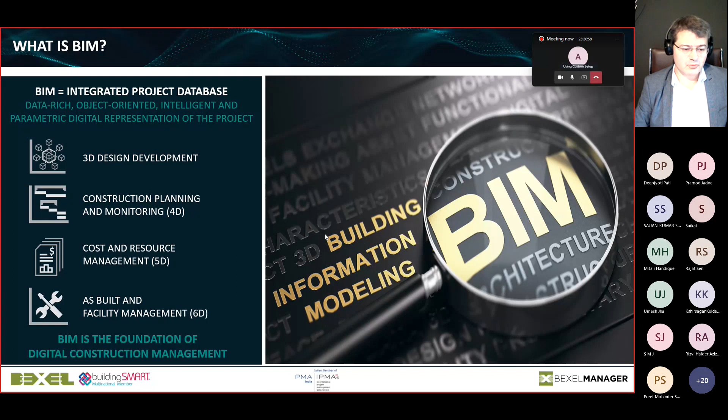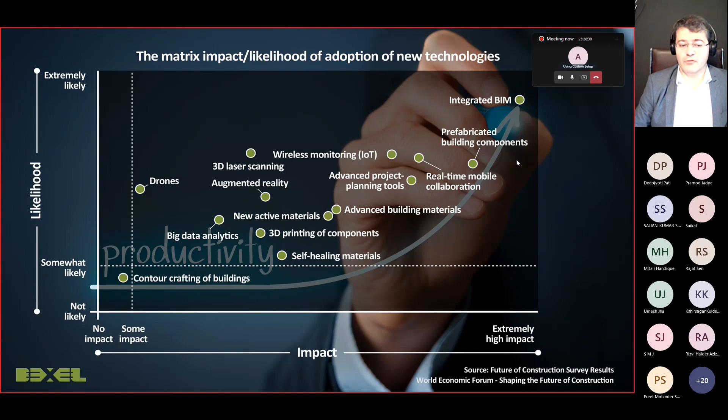There was research done by the World Economic Forum about what will have the highest impact when we are talking about new technologies in the construction industry. Of course, the focus was always on productivity, and in their research they used various cool new things like augmented reality, 3D laser scanning, drones, 3D printing, big data analytics, and so on. And the result at the end was that integrated BIM, the ability to integrate this data, to have a concept of a single source of truth, will have the highest impact and is most likely to happen in the near future. And that's actually what we have been doing for the last 17 years.

What was the problem? A lot of manual work, a low level of automation. There was also the saying that construction people are not interested in digitalization and so on. But reality is a bit different. In the beginning I was blaming the industry and the people in the industry for these relatively poor results. But reality is different. Construction projects are by far, in terms of project management, the most complex challenges, and execution of those projects is the most complex and challenging compared to all other industries.

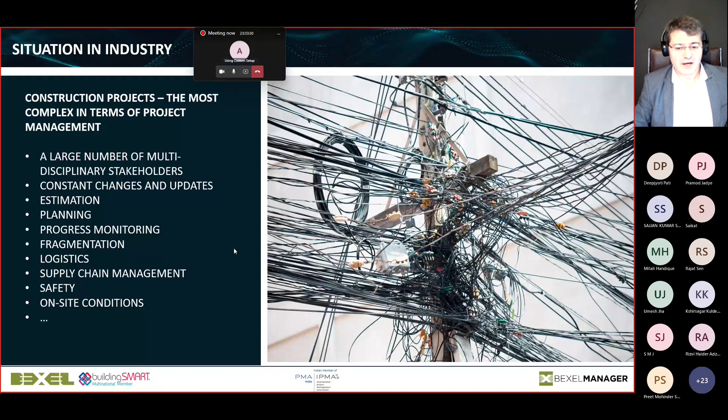And that's why we are facing challenges in these processes. So the only solution is if we have a certain automation. Otherwise, we will still have no significant improvements and, I have to say, unfortunately, poor performance because of all these challenges. Simply, humans cannot manage all these challenges; they could have extremely high experience, but it's very difficult to manage this manually.

Another challenge, as with every new technology. So this is an interesting statistic. More or less, it's the same with all new technologies. People first do not trust technology, are not willing to change. We as humans are reluctant to any change, almost all of us, and that's what we see here.

Especially if we do not know something. The people in this statistic, this is from the United Kingdom, say they are not using BIM because it's not a client demand. And of course, we don't have expertise. There is also an issue with cost and so on. But the thing is that when we do not know something, we are not focusing, we are not willing to change and to switch to new technologies.

Another problem, like with every new technology, is that we have a lot of gurus who promise that they will solve all your problems and so on. Usually the most aggressive ones are those who know the least, as usual, and they promote what we call Hollywood BIM, or BIM for the sake of BIM, where you digitalize yourself not for the sake of benefits, but just to be digitalized. And then, of course, results are not good. Return on investment, you do not see the benefits.

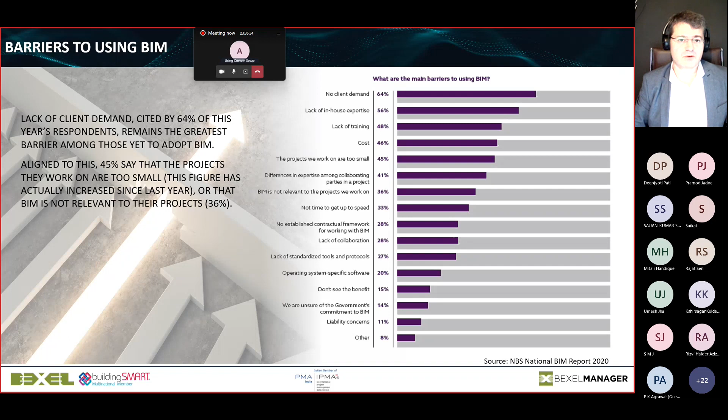So it's always, like with every new technology or new service, about choosing good professionals who really can help you and focus on the real tangible benefits like cost optimization, time optimization, increased quality, and so on.

And knowing the total value of the global output, or even in India, of the construction industry, we are talking about trillions of dollars which could be saved and optimized. Of course, in order to achieve those numbers, we need to focus on the benefits, not on, as I said, Hollywood BIM or just nice videos which cannot bring us real conclusions, but have a digital decision-making process which of course can bring the benefits. The same goes with technologies in other industries.

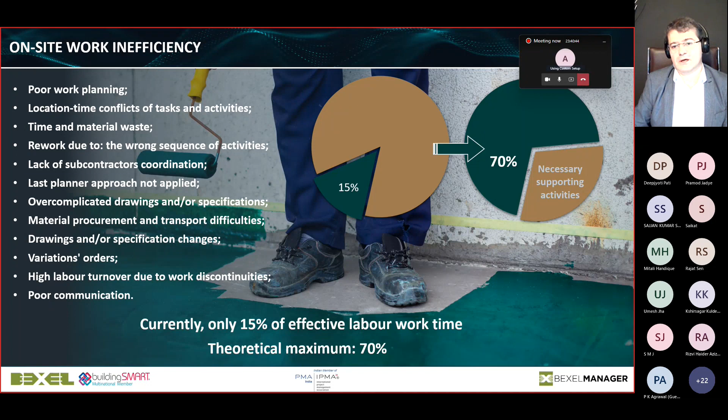So again, construction projects are extremely complex, extremely difficult in terms of project management. On the other side, there is a huge opportunity for optimization, huge potential for more efficient and smart work on construction projects. What is also the usual practice, like with all other new technologies, is that it is always adopted in certain stages where the focus is on how easy it is to implement something and not how large the benefits are.

Of course, the construction stage is very important, but still Excel is the most used tool in this stage, along with some traditional planning tools. For all analysis like monthly progress and financial analysis, you might be surprised, Excel is still the most used solution. So it means a lot of manual work, a lot of manual calculations, a lot of possibilities for errors and mistakes. On the other side, this is one football stadium for the World Cup we now have in Qatar.

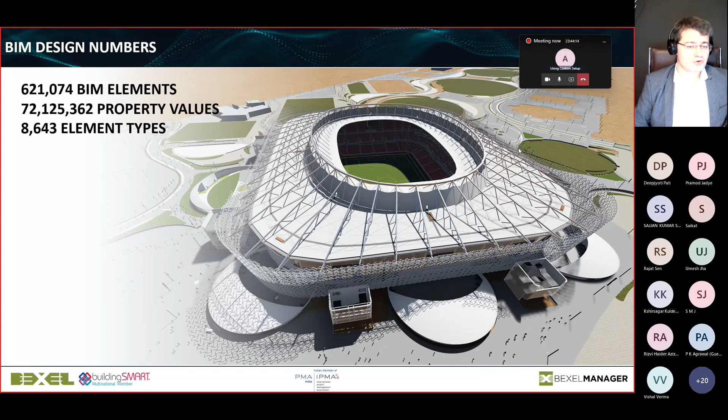Because if we have manual things to do, like in the most popular planning tools, the problem is not that they are not capable of doing certain things. The problem is that due to the manual or semi-automatic process, we cannot cope with the changes and other stuff. And the same goes for estimation and all other analysis. So these are some of the ideas of what can be done using BIM. Very detailed Gantt and line of balance charts, which contain, of course, all relationships with resources.

The second concept is a concept of single source of truth. So how do we know that we are referring to a single source of truth? Very simple. If you change something in design, are you going to have an updated construction schedule? Are you going to have updated cash flow? Are you going to have an updated cost estimate?

Are you going to change the costs which will be included in the monthly payment certificate? Are you going to automatically check design issues with the new design version? Unfortunately, today the answer is no. Literally all these analyses are managed separately and we do not have a single source of truth.

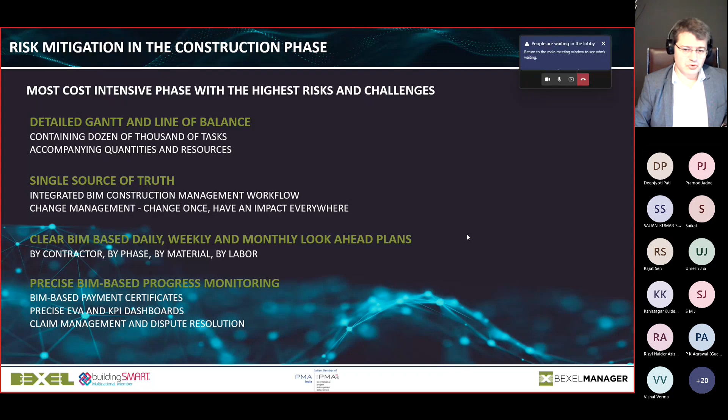And that's one of the biggest problems when we have claims: because we cannot handle all this information, it's very difficult to identify what the truth really is, and that's why we have a lot of disputes on construction projects.

If I want to explain this to you in a simple slide, the truth is that even if we have certain BIM tools applied on a project, we usually do all analysis the traditional way and then try to manually connect them with the BIM models. And we call this BIM. It's not BIM, it's just a connection. All our processes are still manual. We still have different sources of truth.

We have planning updated 3 months ago. We have progress updated a month ago. Our financial analyses are from 4 months ago and so on. And so we cannot grasp the truth. And the problem is that we do not have any optimization. This is literally just additional work for us, because we have to do everything we did before and again connect this with the BIM models.

So the reality is that we still have a lack of accuracy because we are not benefiting from the models and all this huge data, but on the contrary, we need to manually connect them, and we call this BIM level 0. So this is nice to have. There are some small benefits, but in terms of optimization, there are not too many benefits. It usually costs us more, and we unfortunately do not have actual data, detailed cost estimates and construction schedules.

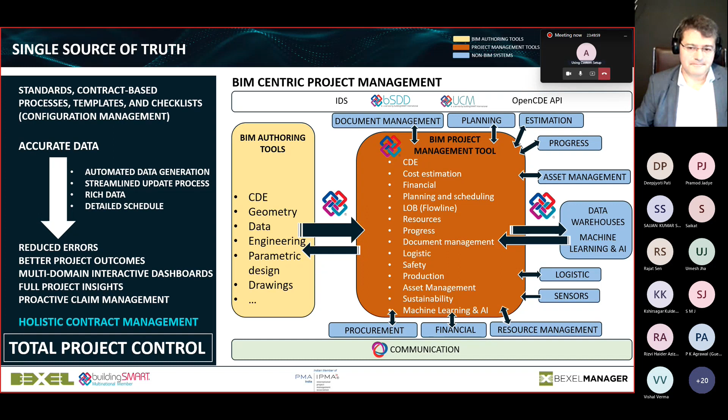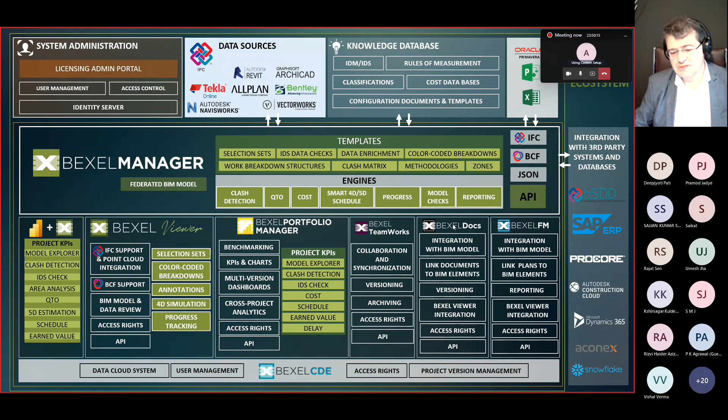So these are some of the solutions. This is an example of our technology, but you can find a lot of these examples available on our website. So I'm not going to go deep into this. I will just show you some examples of how the system works and how BIM can be used.

The thing is that when we are talking about automation, this is one of the key things. If we cannot have automation and streamlined workflows, even as I said in Excel, can we manually create 50,000 cost items? Yes. Can we manually measure all things for quantity takeoff in any construction project? The answer is yes. Are we doing that? No. When we change design, are we automatically changing this? No, simply because it's so labor intensive and prone to errors.

The same goes with the Gantt charts. Can we do a Gantt chart with 50,000 activities? Of course, yes. Can we define all relationships? Yes. Can we theoretically attach resources to all these activities and tasks? Yes. Are we doing that? No, because again, there is no automation. Without automation, simply due to limitations of time and human limitations, we cannot cope with this.

So this idea is to utilize all the data. Of course, these are now technical terms like IDS or 4D schedule generation workflows and so on. But the idea is to utilize everything which is previously generated and produce other analysis almost automatically. So here are some of the videos where you can see how it works. You have simulations, you have cash flows, you have resource usage analysis, and so on.

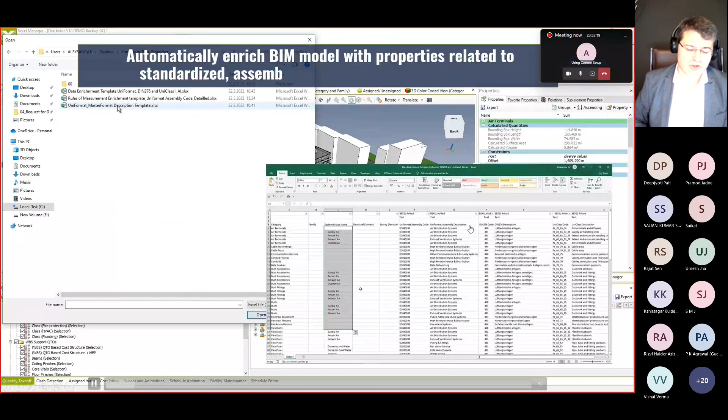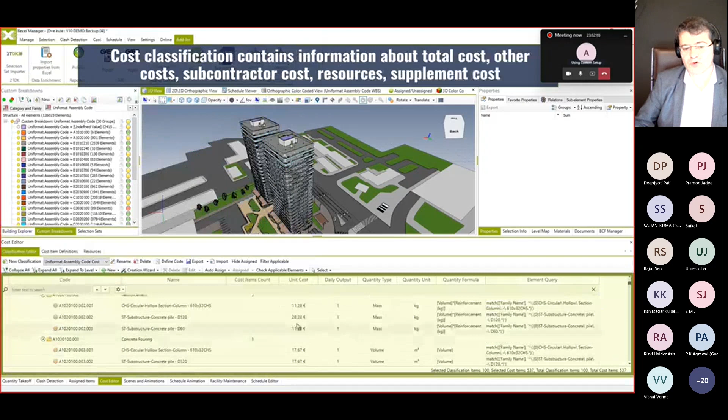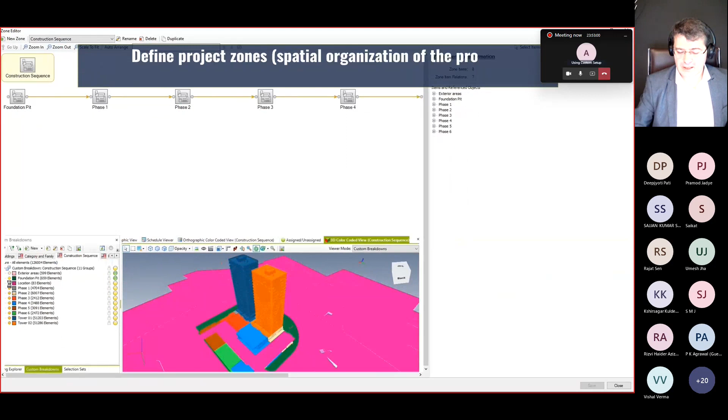In these videos, I will try to explain to you how from just the pure BIM model, without any analysis, the system automatically creates cost breakdown structures by using a knowledge-based template. It's always the idea to use previously generated knowledge. Knowledge management and utilizing our previous experience in a digital format is definitely one of the keys for this full automation. In this case, literally in a couple of minutes, a cost estimate is automatically generated. This is one of the huge innovations Bexel is doing.

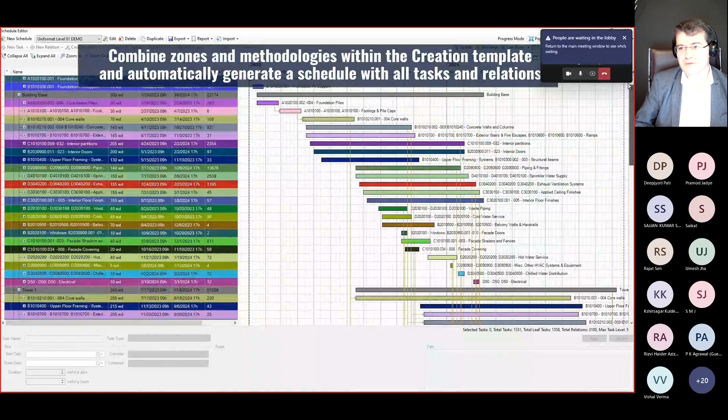This is defining the sequence of the works, or what we call the methodology or method statement. There are, of course, plenty of additional things behind this. Bexel technologies are able to literally automatically in a second generate very powerful and very detailed construction schedules, and line of balance where we see location-based scheduling. And by having all this, we can automatically do cost optimizations, identify space conflicts, see a resource analysis, and then at the end see this visualization.

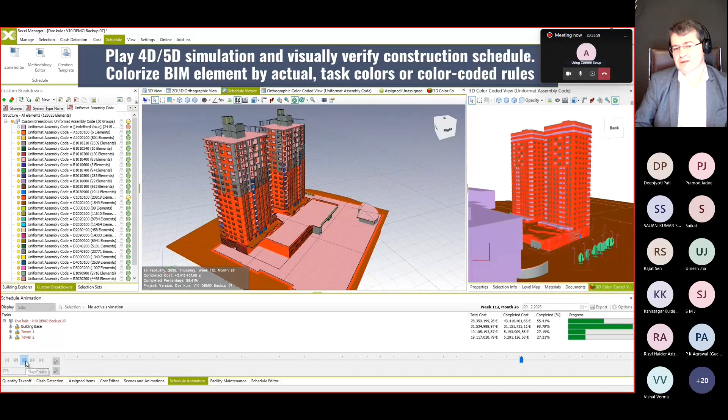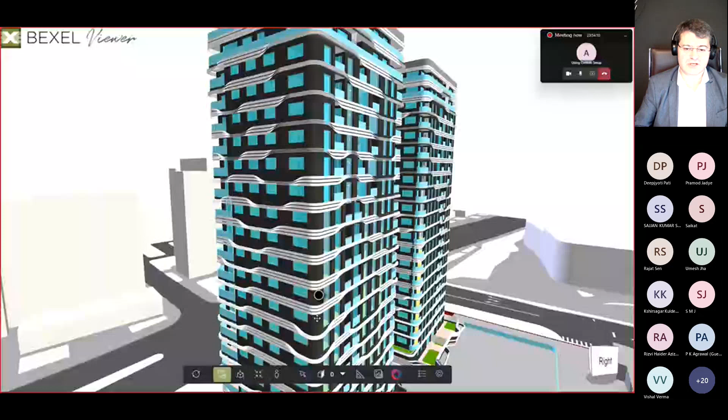So this is the end result, not the key result of the project. The ability to visualize this, if we cannot see all the analytics behind it and cannot optimize the resources, is nice to have, but does not help us significantly. The same goes with a workflow where we are able to send to the site what is necessary to be done by each subcontractor or the crew and the team.

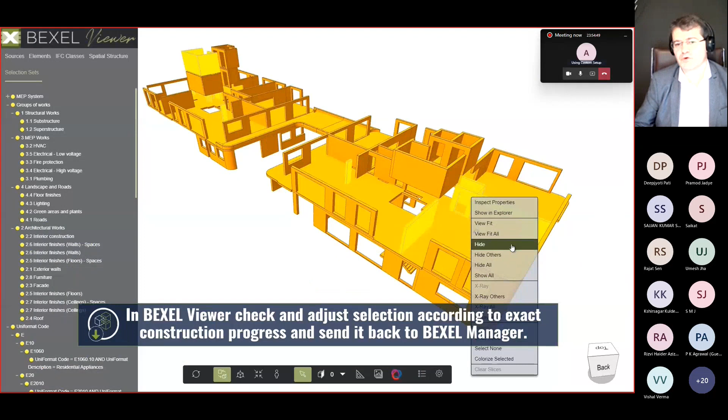It might be interesting for you to know that today's technologies are able to do that. From these very detailed Gantt charts you automatically send what has to be done to the site, and you just deselect certain elements which are, for example, not finished as planned, using certain ISO standards like BCF and so on. You send the information back to the system, and the system automatically calculates a monthly payment certificate and creates an updated construction schedule. If you just load the data from the site, you can see all these quantities, actuals and so on are automatically calculated.

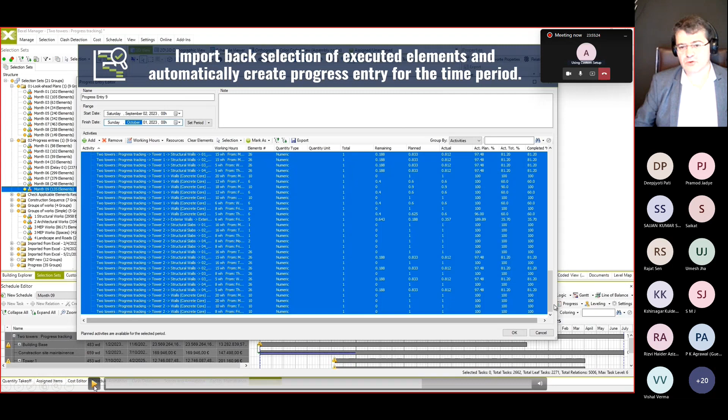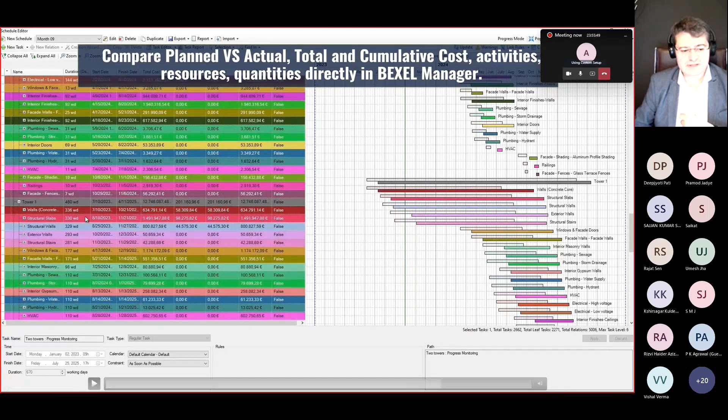To do all these numbers and calculations manually will literally take a huge amount of work, and it's never going to be as accurate as if it's done in a streamlined flow. If I just stop here, you have, for example, direct earned value analysis. You can see the differences between planned and actual works. And you see planned and actual cash flow and all other analysis automatically.

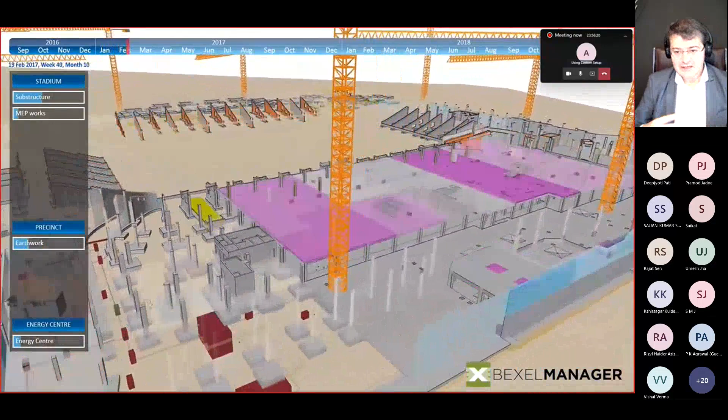So let's move to another simulation where, again, by utilizing all this, in the 72 million of property values I mentioned. I hope it's smooth. You can see how the entire stadium will be generated, literally what should be done on an hourly or daily basis. Again, to do that manually is theoretically possible, but it will take months, or I would say even years, of manual work.

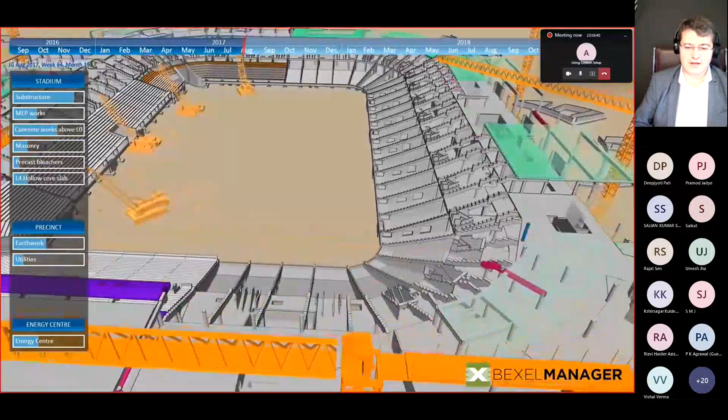And then whenever the design of the stadium is changed, you will need to do more or less everything again. So by utilizing automation, you can really combine it with artificial intelligence algorithms, because the prerequisite for any intelligence is the automation of the workflows, because the systems cannot help you with artificial intelligence if they cannot test various options easily.

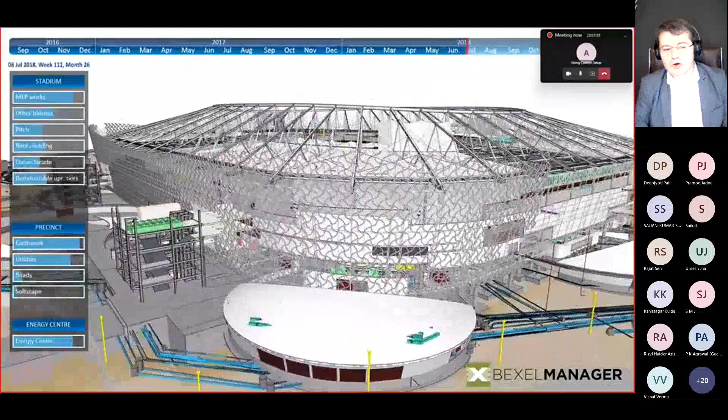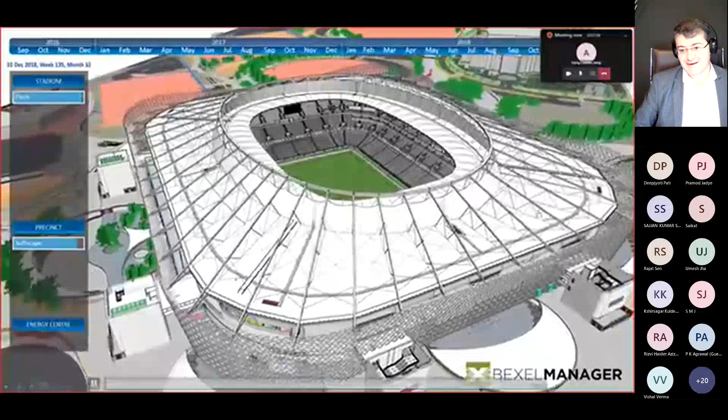And if you are doing all this stuff manually, it is almost impossible to utilize artificial intelligence, because all these neural networks and advanced genetic algorithms and so on require automation and the ability to test hundreds of thousands or millions of options in order to create something automatically. So that's why we are focusing a lot on automated intelligent workflows, because then we can play around with what-if scenarios and so on.

So one of the interesting things is, of course, location-based scheduling or line of balance, where we see different colors. We have a time scale and location. And one of the things which is very important is to always have straight lines and to prevent situations where more activities are done at the same time at the same location. What is also very interesting with location-based scheduling is that in this particular example, we can easily identify the waste. In Gantt charts, unfortunately, we cannot do that.

Of course, Gantt charts are useful for certain things, like the critical path method, and that's why we are combining them. But let's say we are working on a structural design here, or we have facade works here, and on the other side we have certain finish works here; all these gaps where we are not performing any works on a certain location are potential wastes.

Of course, sometimes they are required. For example, in this case, if we have just a building base and we are not about to sell foundation slabs separately because we need to finish the entire building, that's maybe something which cannot necessarily be optimized. But there are plenty of things which can be optimized, and they are very easy to identify with line of balance. And this is an example of an optimized, automatically generated line of balance simulation in Bexel.

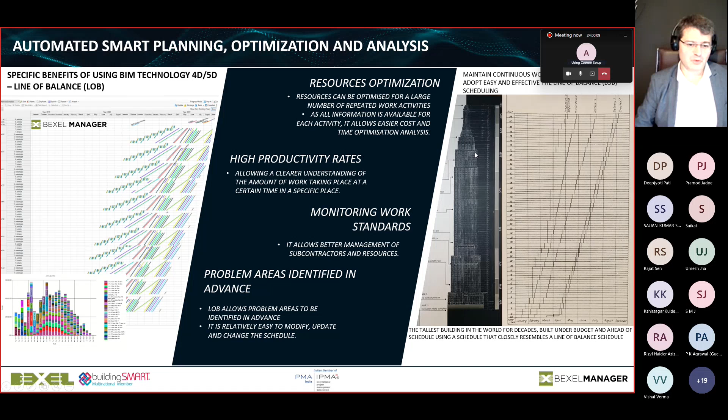And what might be interesting for you to know is that the tallest building in the world for 40 years, the famous Empire State Building, was not managed without computers using Gantt charts, because they did not exist at that time, but instead with line of balance. And this is the original line of balance and location-based scheduling. And what we can say is that this building was built in just 13 months, and today we would need much more time to do the same building. So that's where we can see that we are not always moving in the right direction.

There are a lot of guidelines, and I'm sure you are aware of them, on what should be avoided or maximized. One example is start-start or start-finish relationships. They must be minimized. Unfortunately, we usually have a lot of them, or open start, open end relationships. In certain companies, this is forbidden. When you have a lot of start-start relationships in your planning, it means I don't have data, I need to do some approximation. And the problem later, when the schedule is executing, is that this does not help us at all, because it does not allow us to update schedules automatically.

There is also activity duration. Whenever you see that an activity is longer than 5 days, or you have one activity of 6 months or 3 months, usually it means I don't know, and this is just my best guess, and this should be avoided. Then spatial, location-based breakdowns and all the other stuff are not done, not because we don't know how to do that, but simply because we cannot do that manually.

And that's why, if any professional analyzes construction schedules, 95 to 97% of construction schedules generated today are unfortunately not very accurate and not very useful for construction sites. Of course, there are examples which are excellent, but unfortunately, most projects on average are quite poor, and there are a lot of mistakes. And I'm talking all over the world, about thousands and thousands of schedules we analyzed. So these are some of the analytics of why this is.

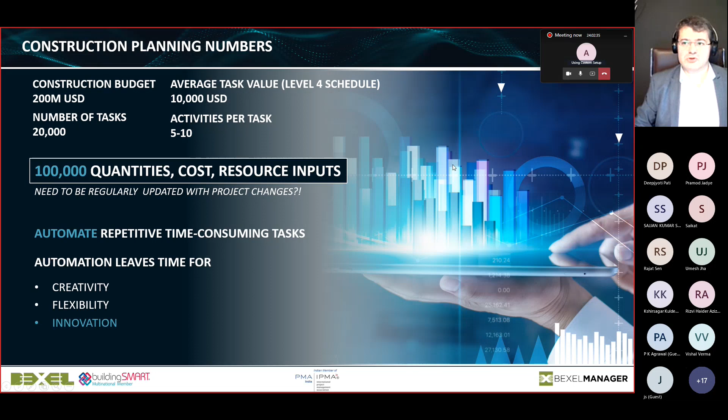Because even on a relatively small project, on a medium size, 200 million, there are 100,000 quantities, resource inputs, and this needs to be done automatically or updated constantly. And to do that in an accurate way without automation is unfortunately almost impossible. So the idea is to have trustworthy and timely information. These are some of the ideas.

So what I mentioned before. The idea is to have proactive claim management, streamlined, efficient delay detection, and time restrictions. So to focus on real delay analysis, to focus on optimized planning, and so on. So to focus on the real benefits which can be brought to the project.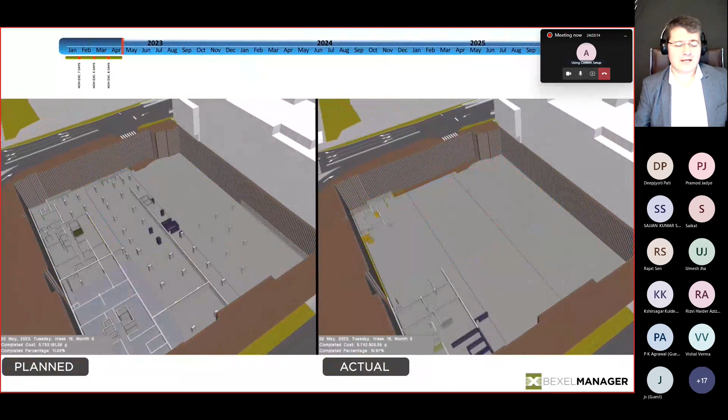So this is an example of delay analysis. In this case, window delay analysis is used, which today is maybe, let's say in the United Kingdom, the only recognized methodology in case of disputes. And so with the red line, we automatically detect all what are called non-excusable delays, or we could see mitigation,

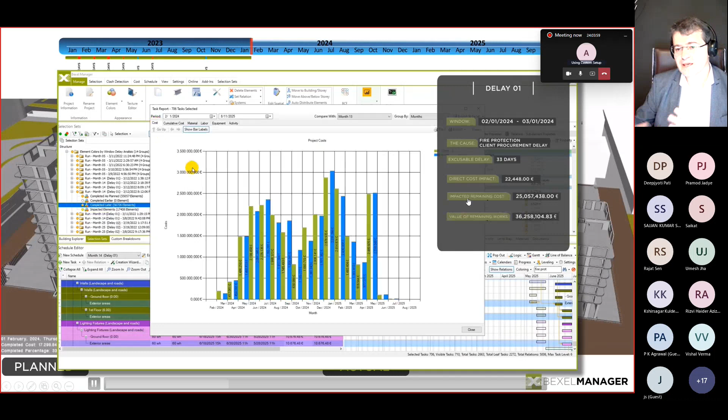and then the system automatically calculates the direct impacts on the remaining tasks. If in this case, let's say, the client did not organize fire protection in a way he was responsible for, the system can automatically calculate all the impacted tasks, and you can visually see those tasks, and the system can automatically calculate the amount of excusable delays.

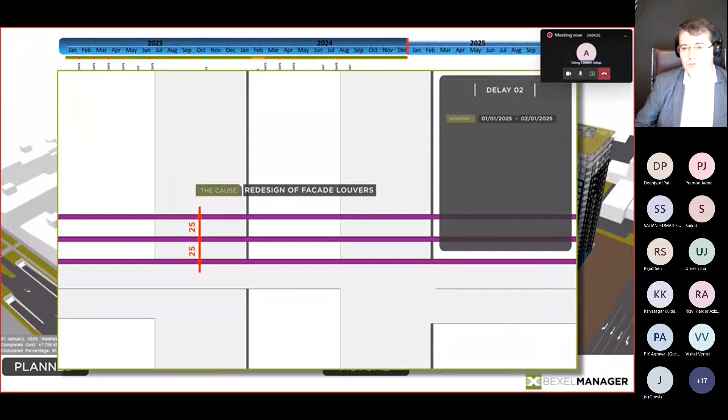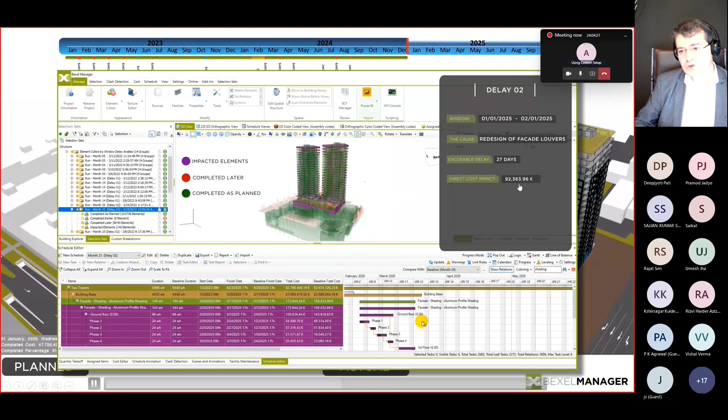And then you, of course, continue with execution. You again have what's called non-excusable delays. And then in this case, for example, the design was changed, again, initiated by the client. You immediately see the cost impact, which is not significant, but could be significant, and the number of tasks which are directly impacted.

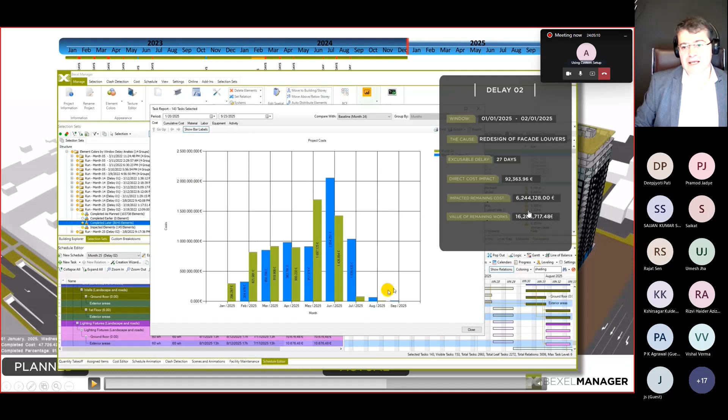What is also very important, I wanted to highlight in this example that impacted remaining cost and value of all remaining works are not necessarily the same. And of course, if you are working on the client side, this is a real impact, not all remaining costs. Construction companies are always willing to present that all costs are impacted, all tasks are impacted. But with proper planning, you can identify all the tasks very easily.

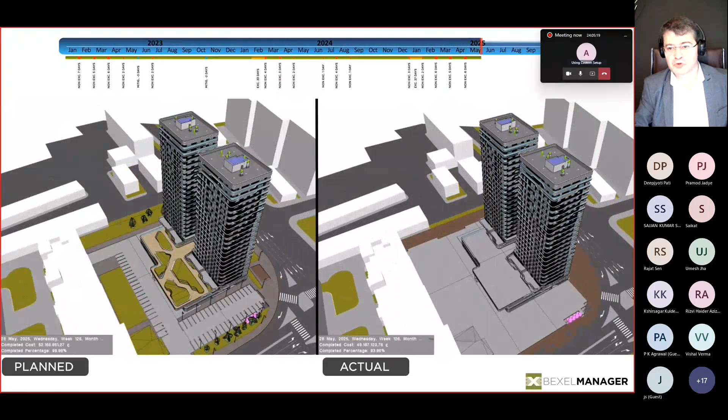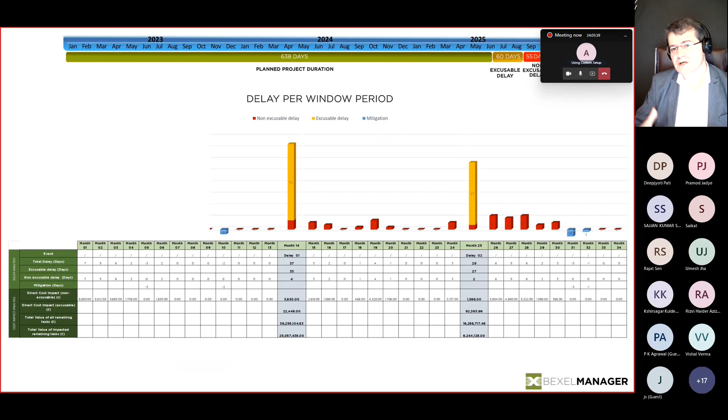The problems are, as I said, that the plans are not good. And if you have a lot of start relationships, you literally sometimes do not have a proper critical path. Everything is on the critical path or nothing, which obviously is impossible. And these are just end results where you can see the project duration, excusable, non-excusable, and mitigation delays. So you can analyze the project, and these window delay analyses are, of course, very important. And unfortunately today, more or less, everything is done manually because the data is not organized in a proper way.

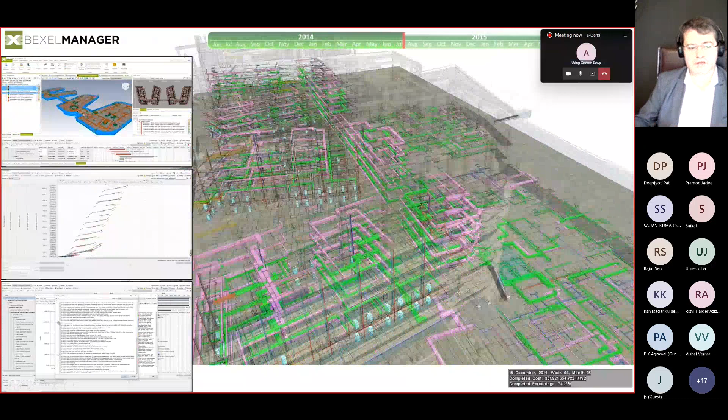So here is another example, one of the largest hospital projects, though it can be equally successfully used on high-rise buildings and infrastructure projects. In this case, this is a simulation, but on the left-hand side, you can see a line of balance, resource usage per quarter, I believe. So you can see that all this is generated. You can see quantity takeoffs. You can isolate a certain task, see a procurement analysis and so on.

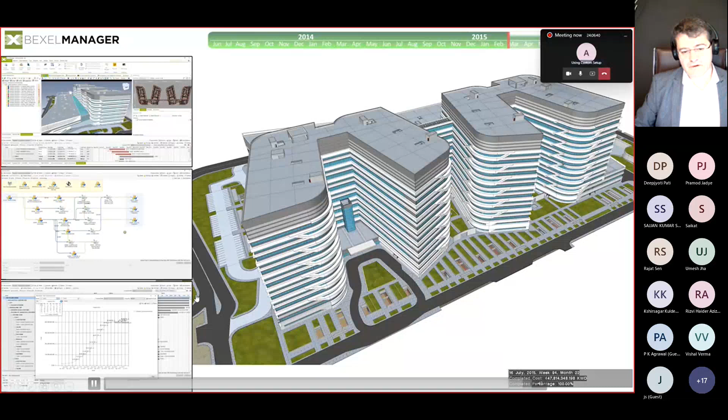So is it possible to be done manually? Of course. Is it accurate if it's done manually? Unfortunately not, because this is a project of more than $1 billion, and of course it's very difficult to handle it manually.

So again, what is also very important is to acquire expert logic. We cannot just solve all the problems with some AI tools and algorithms. We need to capture all what experts are already doing, and try to connect this with intelligence and the power of computers and technologies. So these are various templates for quality control procedures, rules of measurement, data checklists, and all other stuff. Without this, it's almost impossible to have perfect and optimized dashboards.

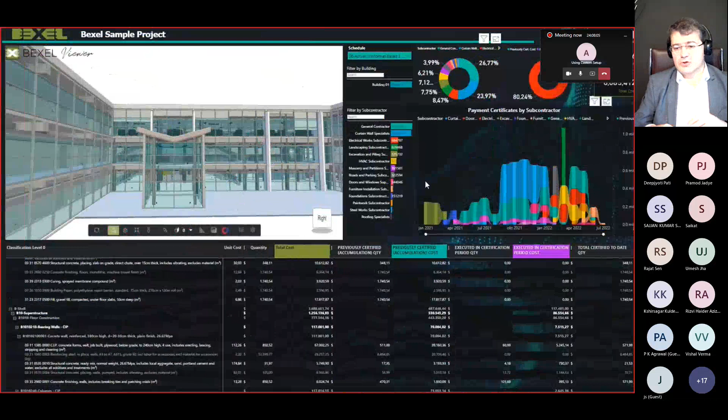So in this case, since we are closing to the finish of the presentation, I will just focus on the benefits of the command centers and show you how, at the end, what we are doing with all this is to enable management to have data-driven or information-driven decision-making. And the only way they can do that is if they can visually easily see all the KPIs and so on. So in this case, you can visually see the clashes on the cloud. You can see monthly activities on the cloud.

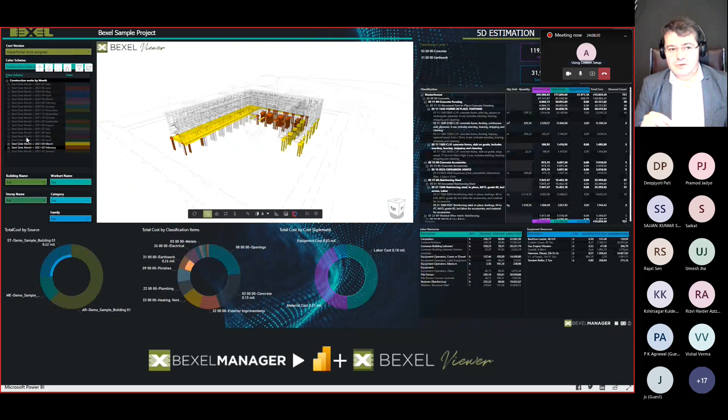You can see the works organized per any color schema, in this case materials or the months when the works are executed, and just by clicking certain elements you can automatically see the total values of the work and so on. These are some examples; I can show you live if you have any questions.

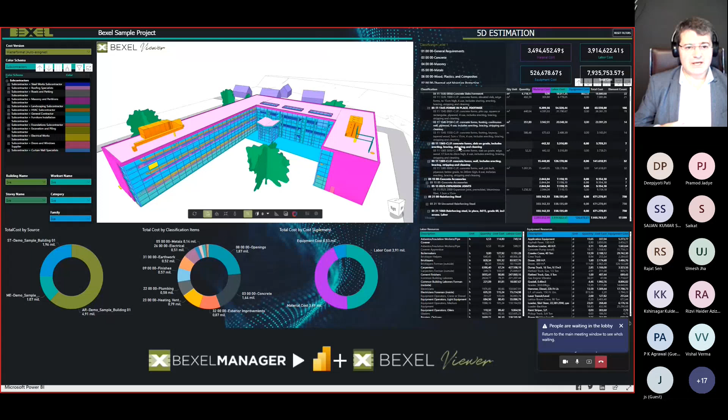So we can always see the cost and schedule variance, so we know who in our team is doing better and who is performing worse. And just by knowing this, we can make a decision. Unfortunately, construction managers usually don't know until the end of the project whether a profit will be made and what the profit or loss will be, because it's extremely difficult to do earned value analysis manually.

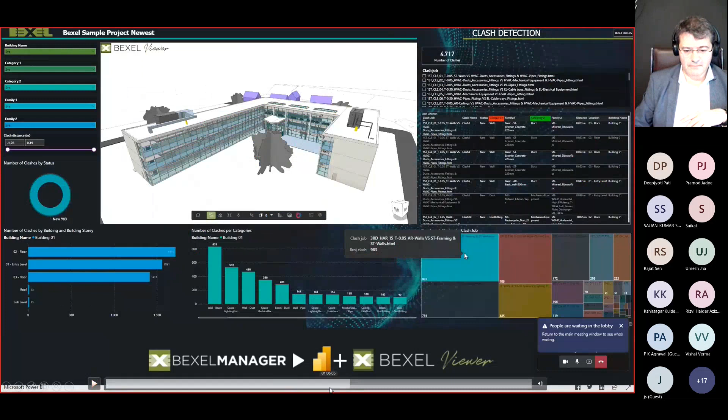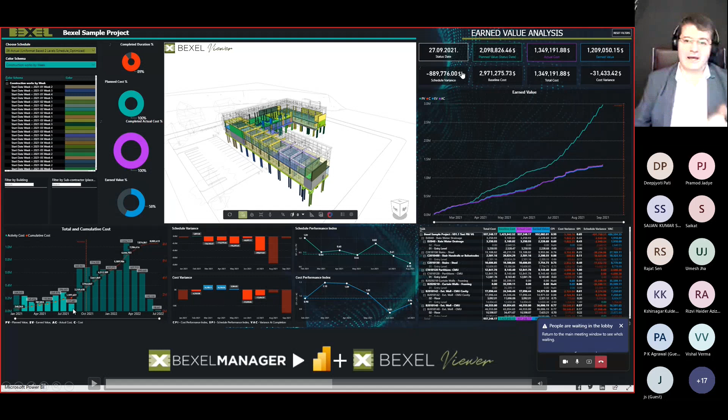Now, just by clicking on the items, I will go back to explain the benefit: when we highlight more months, we see that we are losing money, so earned value is negative, and we have a huge time difference, called the schedule variance. Of course, we can also focus on a certain type of work and again do a similar analysis.

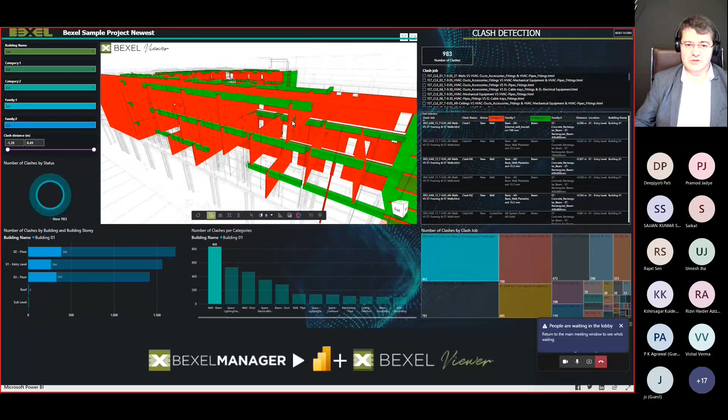One of the components is clash detection, which automatically identifies all clashes and conflicts between the elements in the project. As humans we can do that manually, but it's extremely difficult. I will stop here with one to explain that even if we are not experts in a certain area, we can easily identify the problems on the project.

So this is an interesting example. These are for each subcontractor. This is a payment certificate dashboard. We can see all the numbers here: the amounts of work, what is recognized, what is approved, what's not, and so on. But just a simple situation here: these are the actual works, and these are the remaining works.

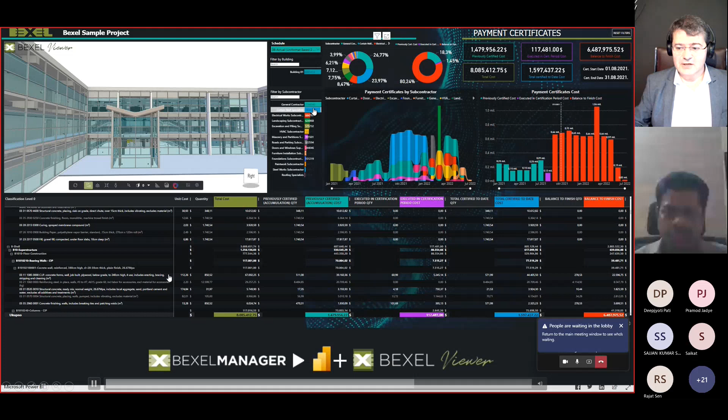So even if you're not an expert, if you know what the actual month was, trusting that everything else will be achieved here, which is unfortunately usual on a construction project, means there are very small chances this is going to happen. Sometimes you're in a position saying we are still planning to finish on time. Sometimes even our planning tools don't help us because they show us what we want, not reality. Bexel will always send you a warning.

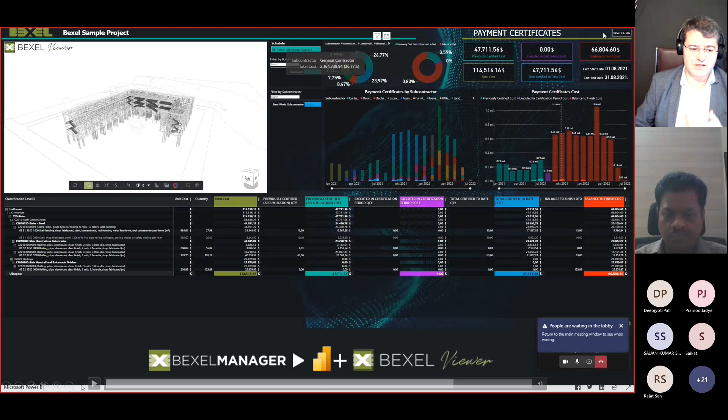In this case, isolating each work type or subcontractor, you can see their cash flows and their monthly payment certificates. You can play around with this, and doing that manually is extremely difficult. These are model explorers. From the model perspective, by type of element, you can isolate, in this case, HVAC, and see the cost of the elements and so on.

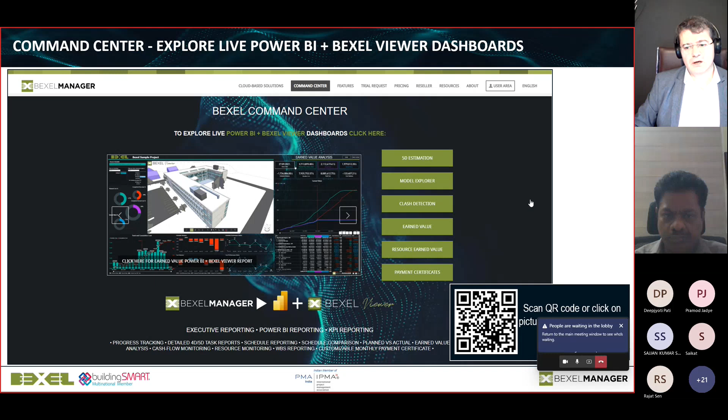So what are, at the end, the expected benefits? The margins of construction companies are unfortunately very low today. Based on actual results, the return on investment is 10 to 15. When you measure the investment in technology, services, or education of your people, and compare it with the tangible benefits, the difference is 10 to 15 times, not percent.

What we usually advise is to focus on the things which are most beneficial, not to solve all the problems in the beginning, because then you could unfortunately get lost.

So the idea is to focus on the biggest and highest benefit. So even with the several promille of investment, you can have significant gains on your projects. And that's fortunately why a lot of companies are now focused on this. But again, digitalization for the sake of digitalization is not necessary. You should always focus on measurable, tangible, clear benefits.

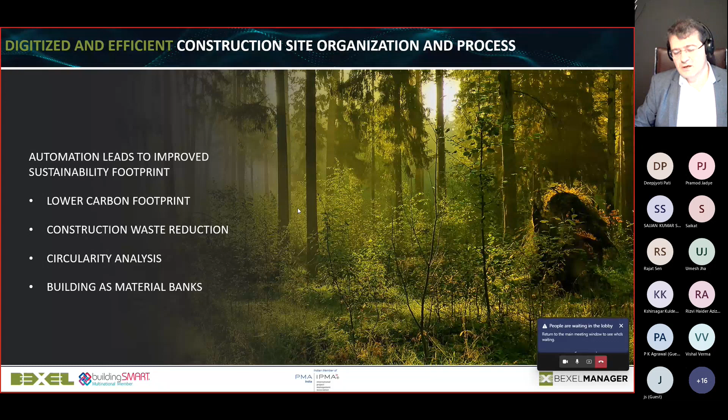Another huge benefit, of course, if you optimize construction projects, is that we will have a lower carbon footprint, because I don't know if you are aware of the fact that 50% of carbon emissions is happening in the construction phase. Of course, later over the years, maybe this number will be higher, but it's going to be across 30, 40 years. A lot of carbon is generated in the construction process, and if it's not optimized, of course the numbers will be much higher. So these are some of the common data environments which can be used in Bexel.

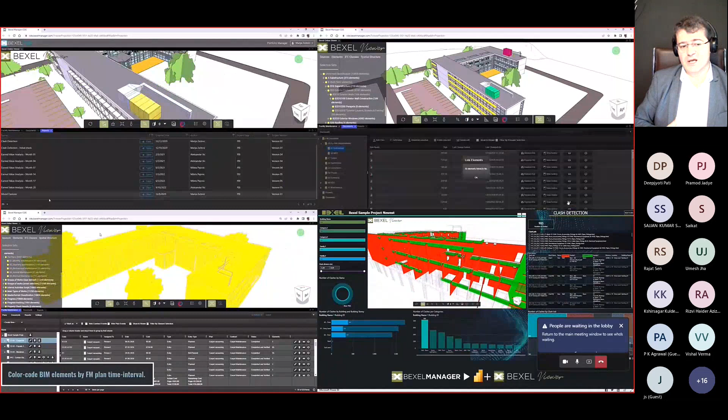Since we are running out of time, I will just speed up this. So just to tell you that again, if the data is stored on the cloud, all this analysis could be streamlined. What we honestly believe is important is that clients should be allowed to have all data hosted on their premises or their designated premises. So we are not big fans, and I am personally not a big fan, of insisting that the data must be stored on our server or any other dedicated server, because that means that data is not under the client's control. And we honestly believe that the ones who generate the data, who own the data, should have the right to decide where the data will be stored.

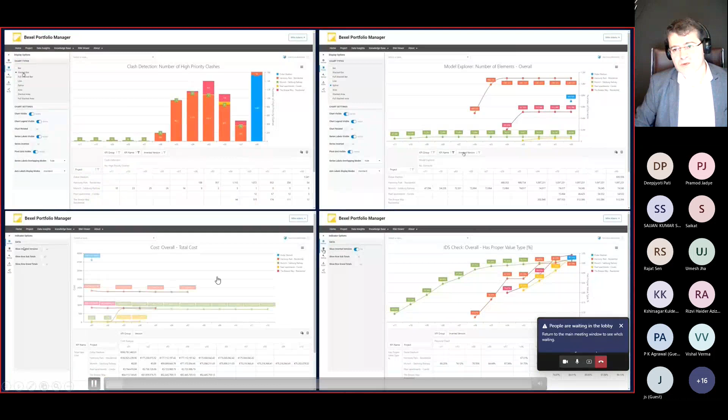So that's why with big clients we always allow them; one example in India is L&T. So all the data, we don't know how they are using it, because the data is stored on their premises. And these are additional portfolio manager analyses, where you can combine more projects and see how information is changing. So you can see the number of clashes or total costs or earned value analysis or delay analysis across not just one project, but across more projects. So this allows you to analyze portfolios.

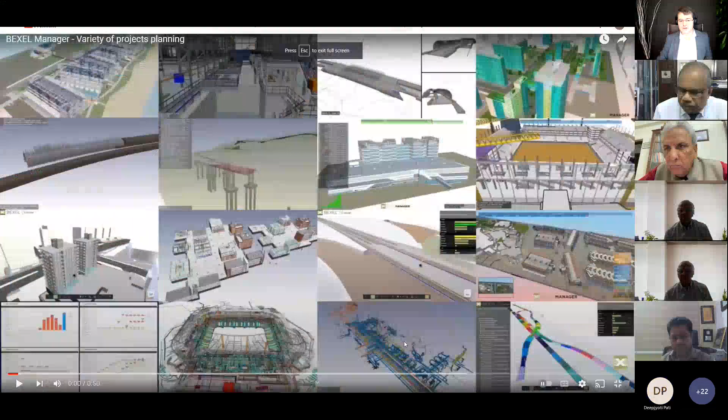Maybe just allow me to try immediately to answer, to show you examples on other types of projects. This is a very good question. So I will now put in the chat some examples, so you can just go to YouTube and see totally different types of projects. Maybe, if you allow me, I can share my screen. So can you see my screen now? Yeah. Okay, just a second. Sorry, it's maybe 30 seconds.

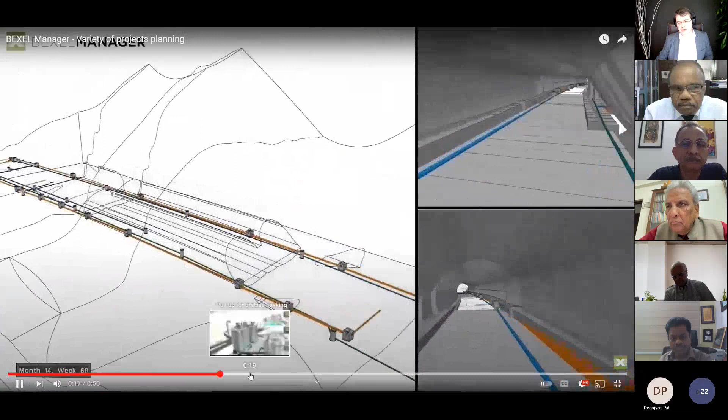So you can see total infrastructure, railways, bridges. I guess you will also see plants, because we are working also on plants and other types of projects. Just let me try to speed up if there are some infrastructure projects as well. In this video it's not, but you can find it on our website. So we worked on substations or plants or oil and gas and so on.

So actually we are now helping in claim management for the largest plant in our country. We are supporting delay analysis and so on. So this can be used in totally different types of projects. Of course, there are certain slightly different workflows which have to be implemented in those cases.

Another question was regarding the improvement in operation. Operation, my understanding was operation and maintenance. Yeah. So you also have the Bexel solution for that, just to give you a couple of things. You store all the data, all the documents, all maintenance plans and maintenance entries on the cloud, and everything is related to the BIM model itself. So when I isolate, I can automatically define the document checks.

So one thing is that for every chiller in the project, I can check if it has a user manual, operation guideline, if it has a warranty, photo. If I go to the site, let's say you can define maintenance plans on a weekly basis, and I can visually see where the elements are in my building, in my plan, which I have to maintain that week.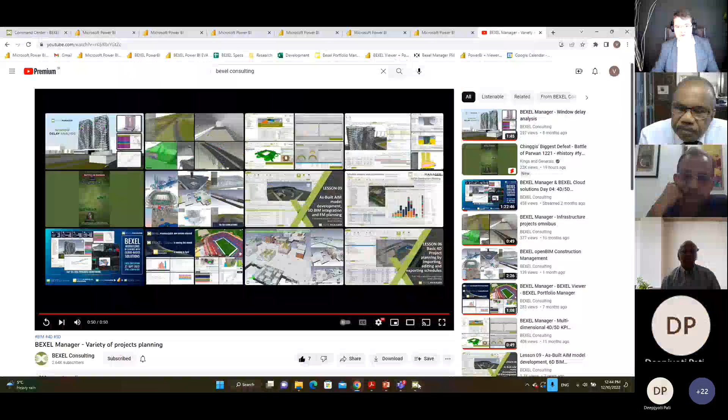Yeah. It's something more than that. One thing, of course, is prefabrication. If you allow me, I will just maybe show you an example. So this is a Gantt chart. Okay. So you see now all the costs and everything is there. If I go even, there is a line of balance.

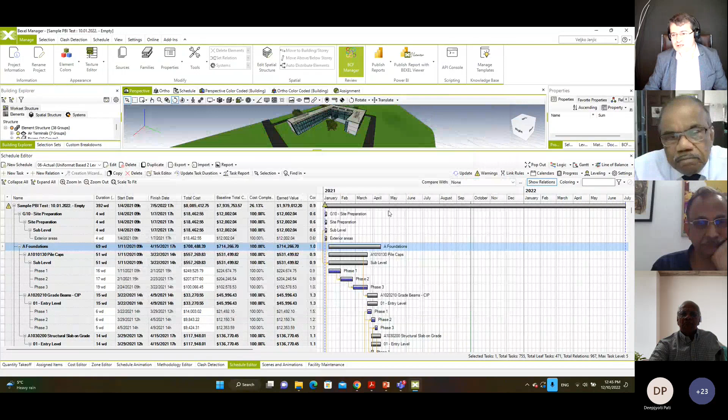And even if I isolate foundation works, if I go here to task editor, to the cost, you see all the cost items, all facade, formwork, concrete, everything automatic. These are all the quantities of the works. Even I have automatically resources. So how many carpenter working hours I need. And then if I want, I can export this to, let's say, Primavera.

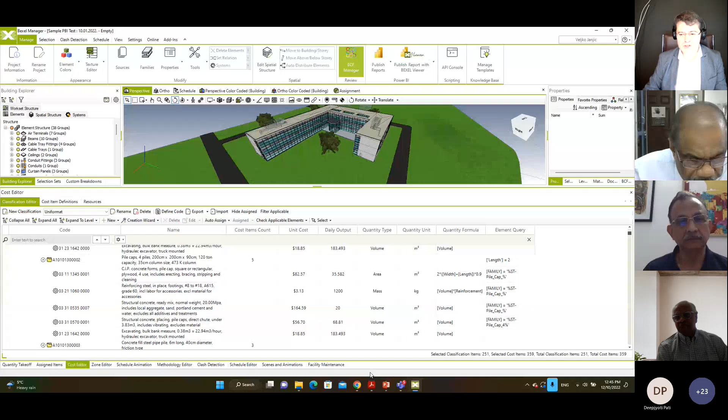But the thing is, just to explain to you how this process is generated. So just in 1 minute, if you allow me, you have a cost database with all formulas. So now I'm about to do a new cost estimate. So this is my expert knowledge, my cost database. So in order to do that, I will just simplify this. So just go here and create a new cost estimate from this

calculations. So the system is now measuring all the elements and creates the entire cost estimate automatically. And then when I finish this, okay, so now all the new cost estimate is generated. So now I see all my material, labor, equipment, and it's fully interactive with this BIM model. So if I just go here, foundations, can you show me the elements in the building?

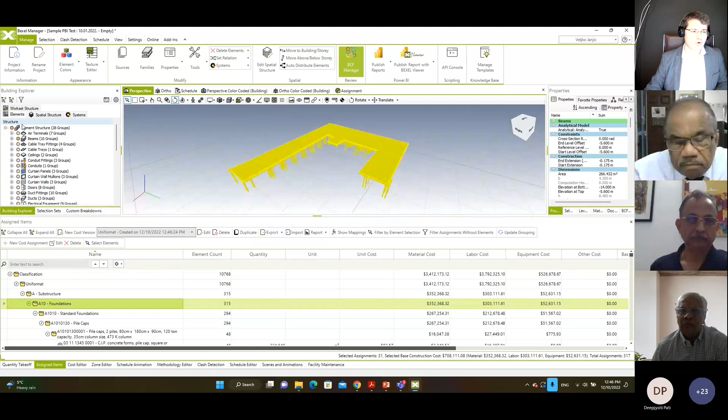Here they are. Or the opposite, if I want to see the elements, just to give you an idea, if this is phase 1, and I would like to see the cost of only phase 1, this is my tendering package. Filter by element selection, and here, if I just move it here, I will see that 2.9 million is my base cost with all cost items and everything. So this is the first phase, how you do automatic cost estimate.

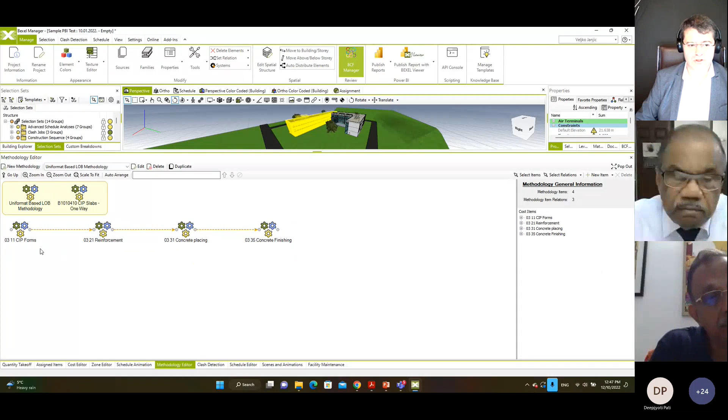The second thing is how to do schedule. So this is a knowledge management system which defines the activities' order sequence, like in an assembly line, what has to be done. So first is preparation, foundation, then you can have multi-level. If I go to the cast-in-place slabs, I can have first formwork, reinforcement, placing, finishing. And what is interesting is that between a residential object, a football stadium and a hospital, 80% or more are the same orders. Of course, a railway project and an oil plant are a bit different, but here everything is similar.

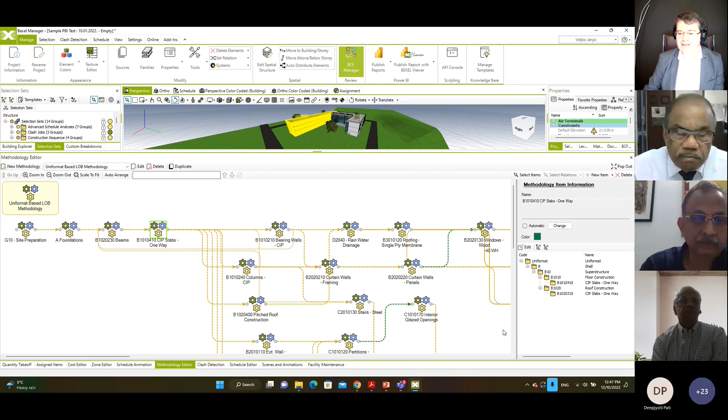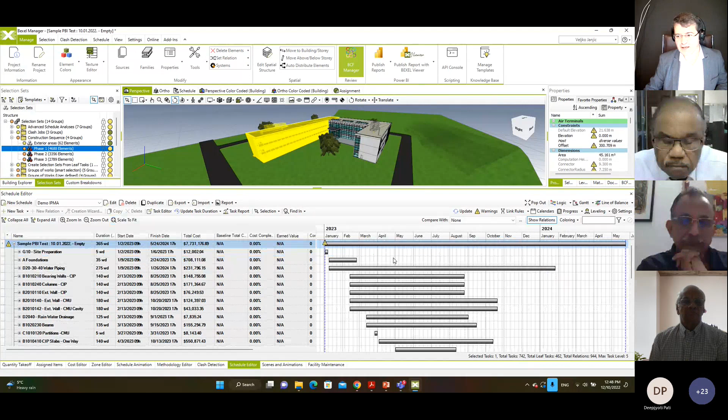So now just to do completely from scratch a new, let's say, demo. And I'm using a cost version created 2 minutes ago. It will be a fully empty schedule. Creation wizard, there are templates. I'm using the schedule logic. Click OK. And the system automatically, of course it's much more impressive on a larger project, creates 1,000 relationships and 742 tasks. If I expand, I see all the tasks, and if I go here again to foundations, you will see again the same numbers.

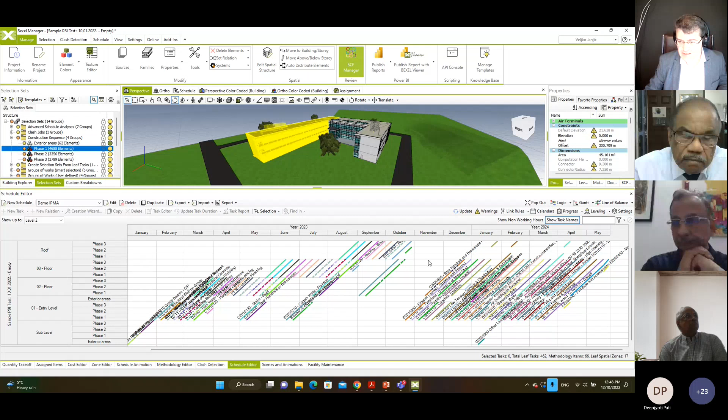And then I can optimize this. I can see a line of balance. There is a waste here, for example, automatically I see this here is a waste. So there are small optimizations which can be done in a couple of minutes. But what I can see automatically is even the animation with the cash flow. So if I switch to the schedule animation and run this animation, you will see literally everything, the red color means reinforcement and so on. So if I stop the animation here, I will see that the current cost is 1.3 million.

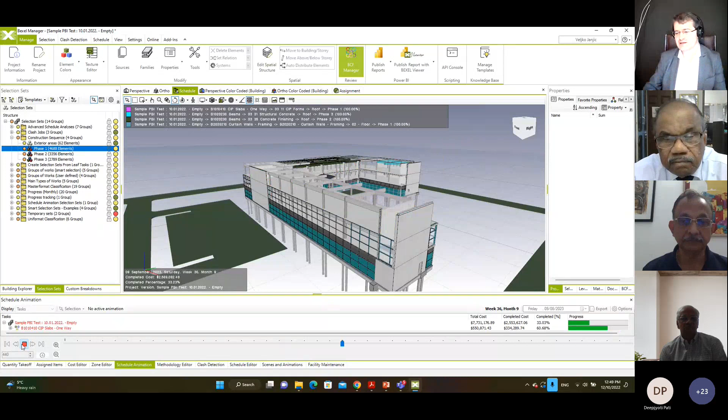So is it possible to do that manually? Theoretically, yes. But literally in 3 minutes, from no cost, I created a cost estimate, created cash flow, and all other analysis. And of course, I can now go back and do all the analysis. Let's say I can open actuals, and if the progress is entered, I can see earned value analysis. I can go here and see a cash flow.

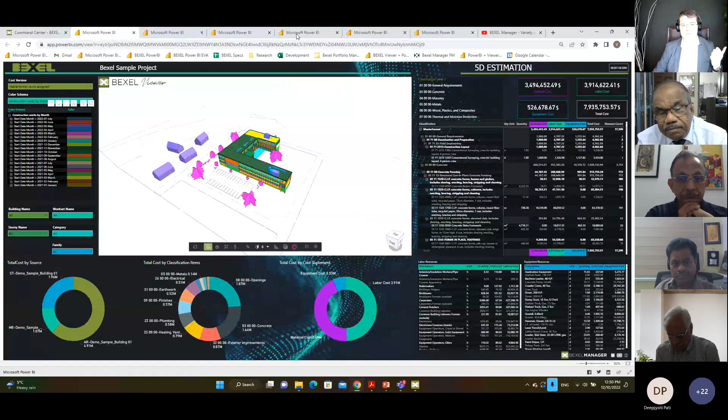So everything which was presented before, all these charts are the same as the charts I have on my dashboard. So if I go here, these are the same. Let's find if I have earned value analysis. Let me find here. Yeah, this is the earned value. I just published this to the cloud, and if I isolate 4 months, I will see. You can play around, go to our website and see all these dashboards, how they work. So I isolated the works which are done from March till July.

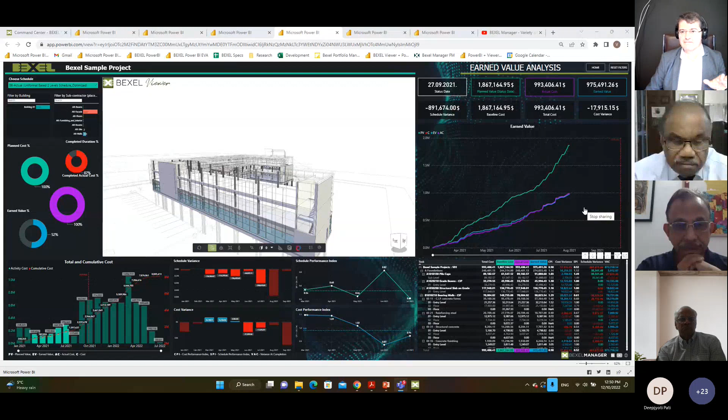And I can see that I lost, this is my cost variance, this is my schedule, this is my earned value, and so on. So one of the key elements is this methodology, but it's fully controllable by human. So I can define that lag between my beams and curtain walls. I can specify the lag here, which must be 3 days or 50 working hours, or if I want to change my methodology between formwork, let's say reinforcement and placing, I'm defining here.

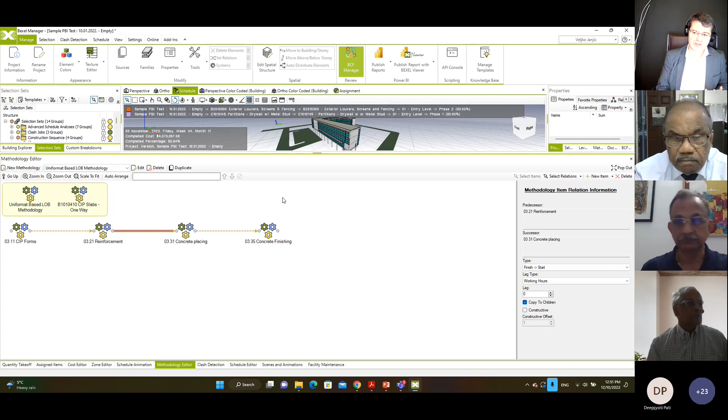So it's not that the computer does everything by themselves. I'm the guy who controls. And of course, I can share this with you. So if I develop as an expert one methodology, Bexel captures the expert logic and allows the others to use my logic. So it's not just in my head, and this is the excellent way how the knowledge could be shared. So this is an example.

So it's not just about prefabrication, which is excellent, of course, and one of the key benefits, but also on the execution of the site, because unfortunately, a lot of things cannot be prefabricated. Fantastic, fantastic.